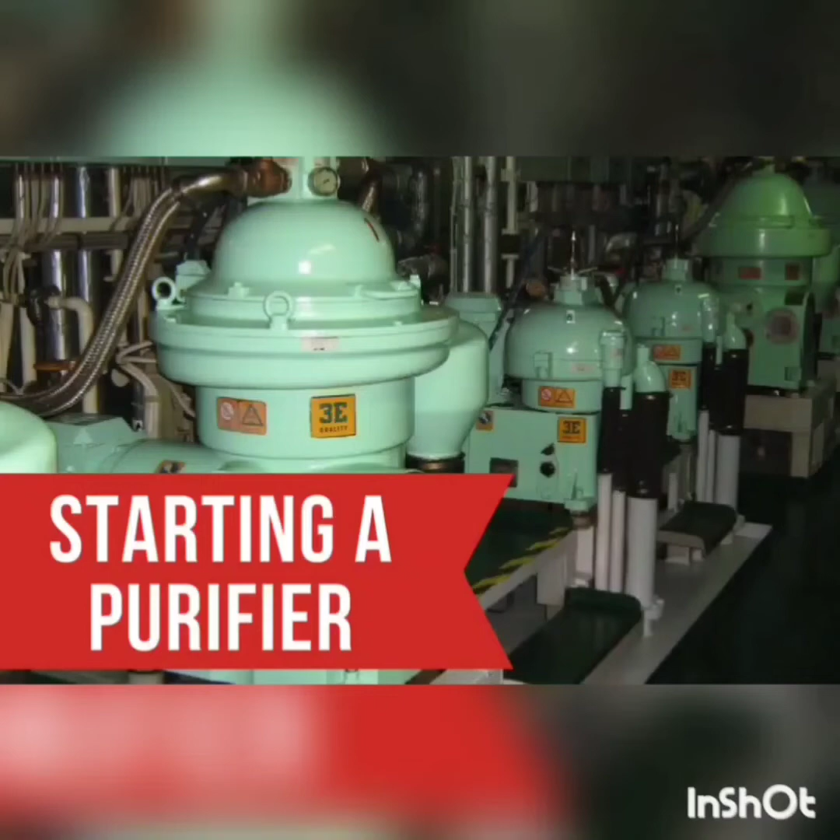In this video, we will understand the sequential starting procedure of the purifier. To start a heavy fuel oil centrifuge separator, the following steps are to be taken.

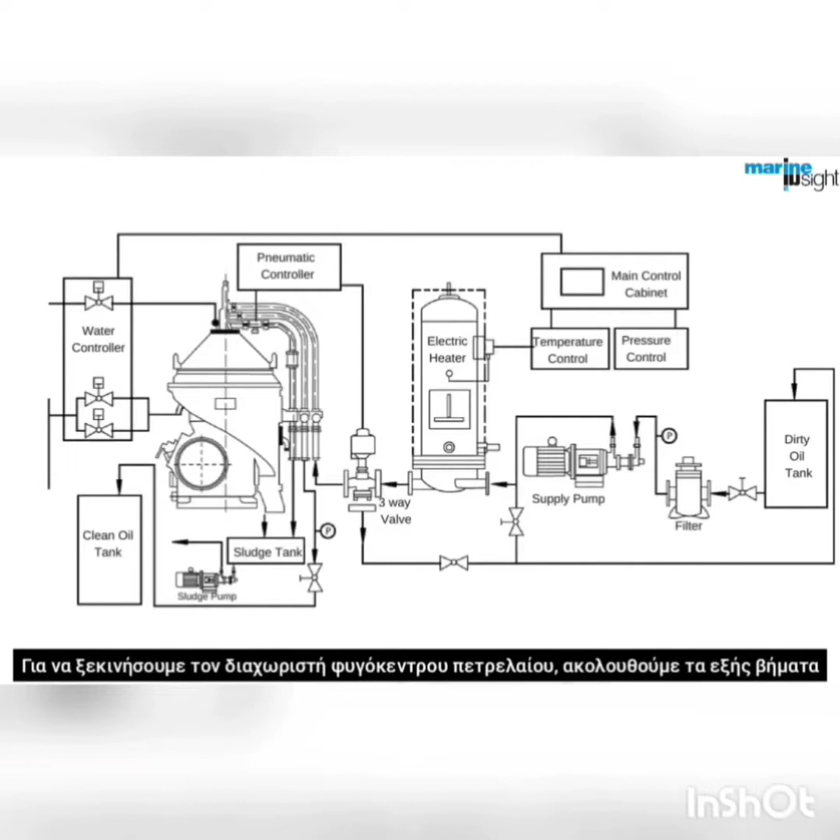Check if the brake is in the release position. Check the oil level in the gear case. Open the discharge valve for the purifier and all the required valves in the line.

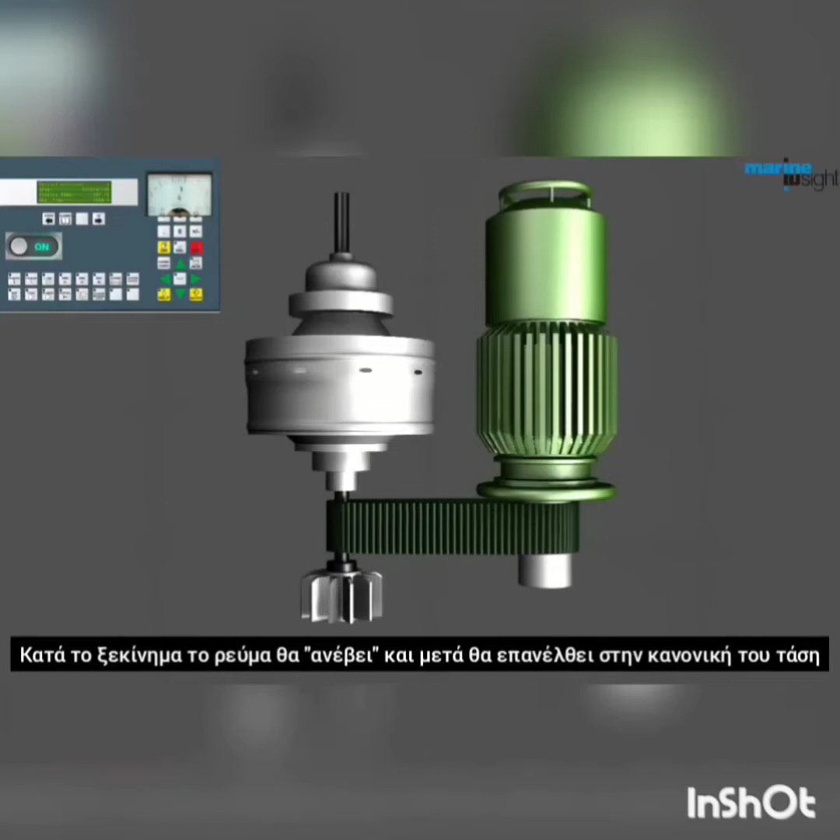Start the purifier power and check for the motor current. During starting, the current will shoot up and in a course of time it will come back to the rated value, which means the required RPM has been achieved. Once the separation program is selected, the controller starts the fuel oil supply pump.

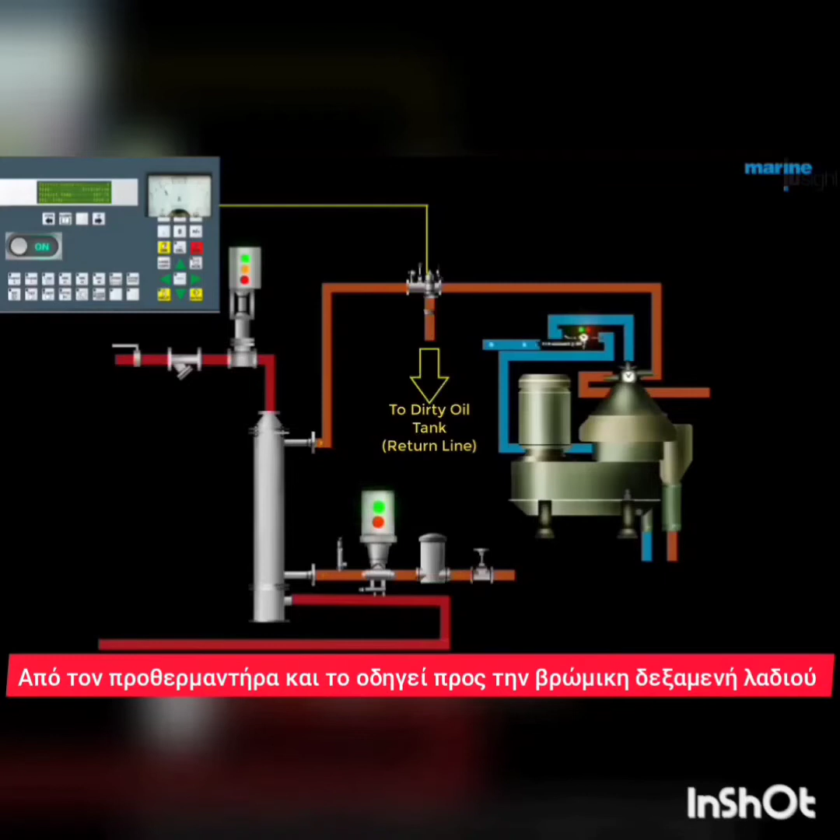Initially, the main controller will recirculate the oil from the heater and direct it towards the dirty oil tank. Open the steam supply to the heater and bring the oil temperature to the set point. Ensure the drains are open so that the condensate comes out from the steam pipe. Close the drain once steam appears.

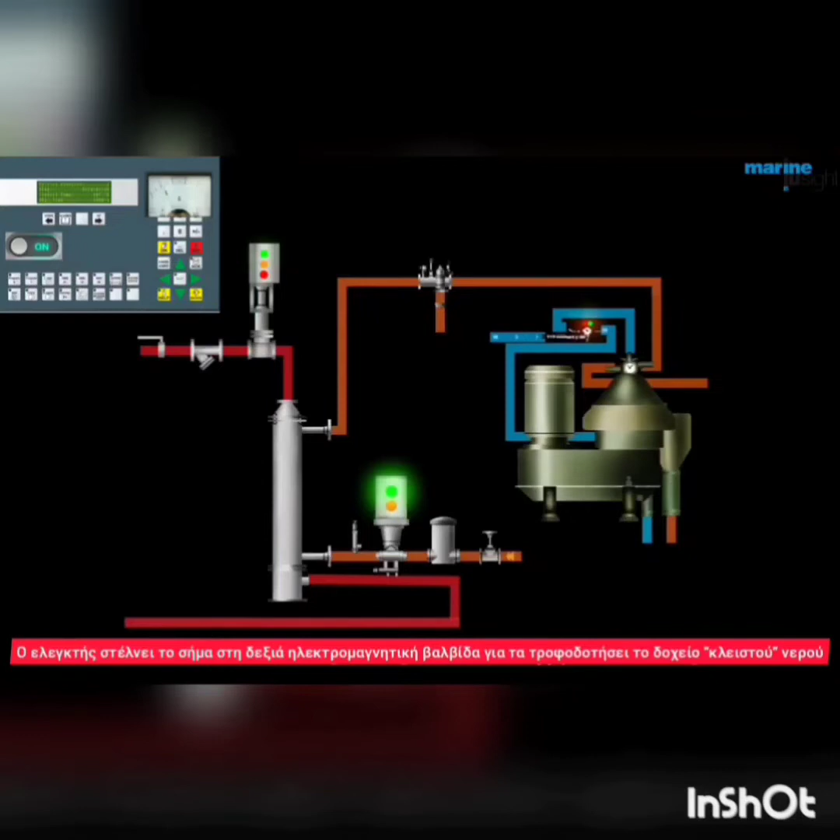Once the oil feed to the purifier is selected, the controller will send the signal to the right solenoid to supply the bowl closing water. As soon as the bowl is closed, the controller will open the left side solenoid to supply sealing water to the purifier. After supplying sufficient sealing water, the solenoid valve will close.

The main panel continuously monitors the oil temperature. Once the set temperature is reached, the controller will send the signal to the three-way valve to open towards the separator.

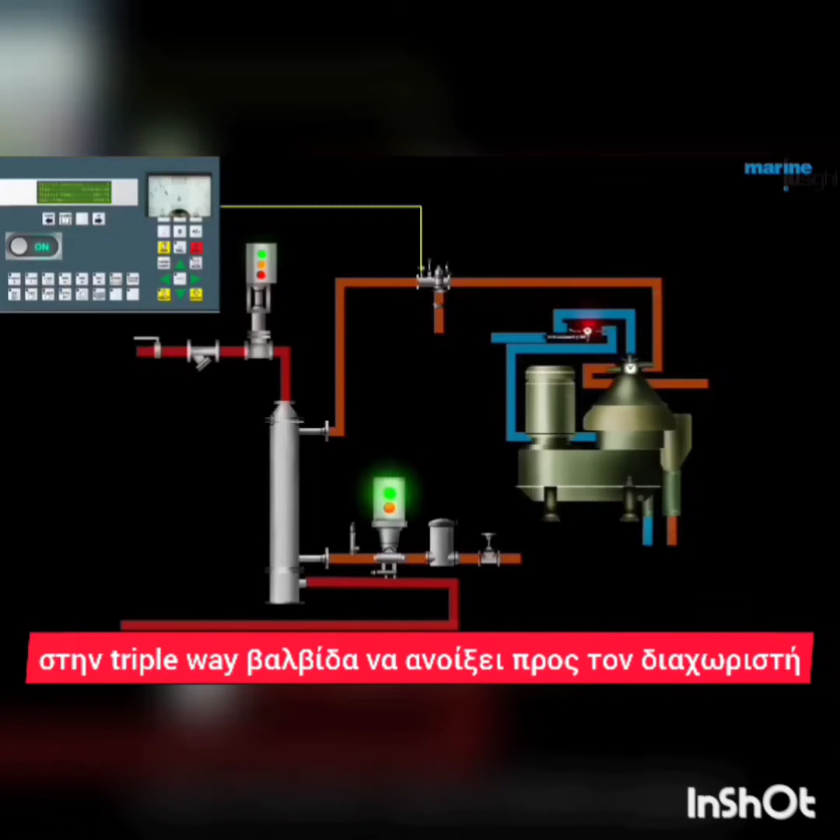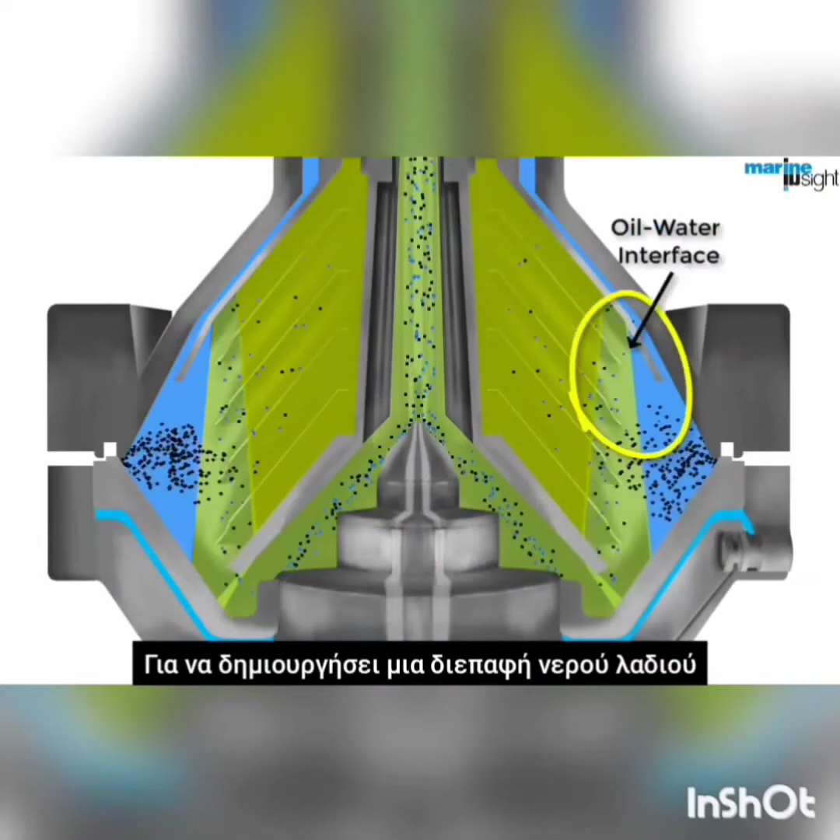The oil will go into the purifier and it will displace the water inside to create an oil-water interface. The position of the interface will be decided by the size or diameter of the gravity disc. The engineer officer should check the manual to fit the proper size of gravity disc for the specified oil properties.

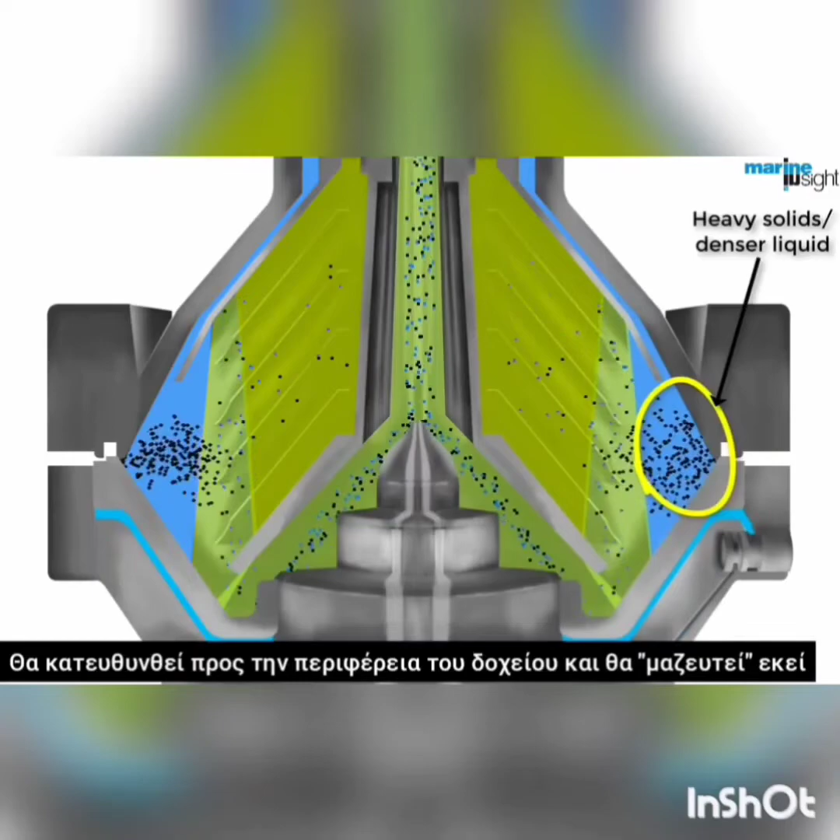Once the oil-water interface is made, the heavier solid and denser liquid will go toward the periphery of the bowl and get collected there. The fixed-type centripetal pump on the top provides sufficient flow velocity to the purified oil and sends it to the fuel oil service tank.

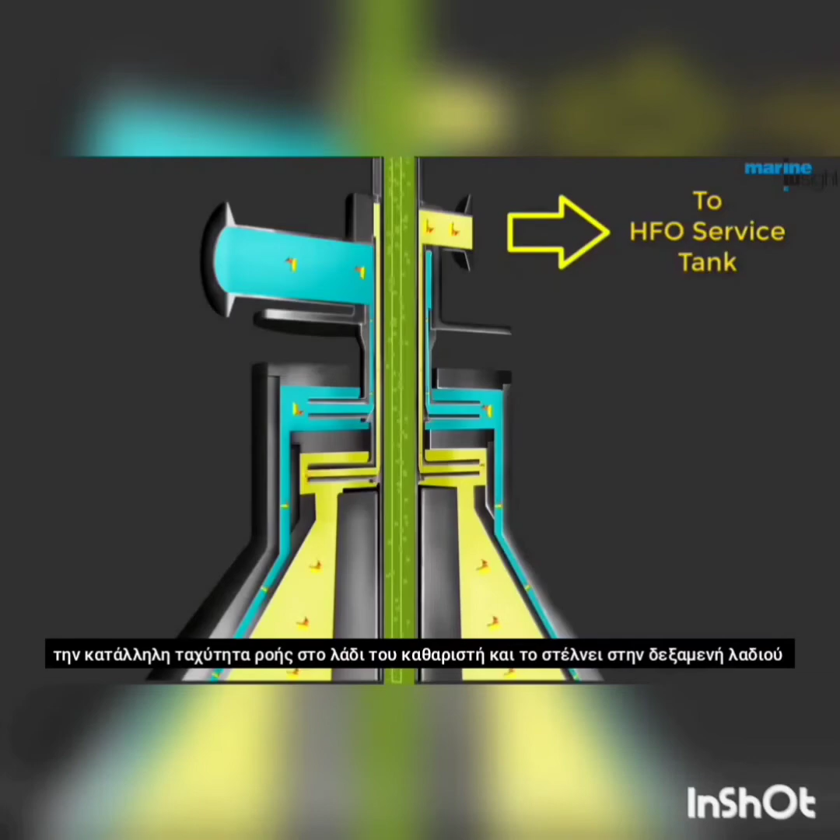The main control panel continuously monitors the back pressure and the discharge valve opening will be throttled to maintain the required feed rate.

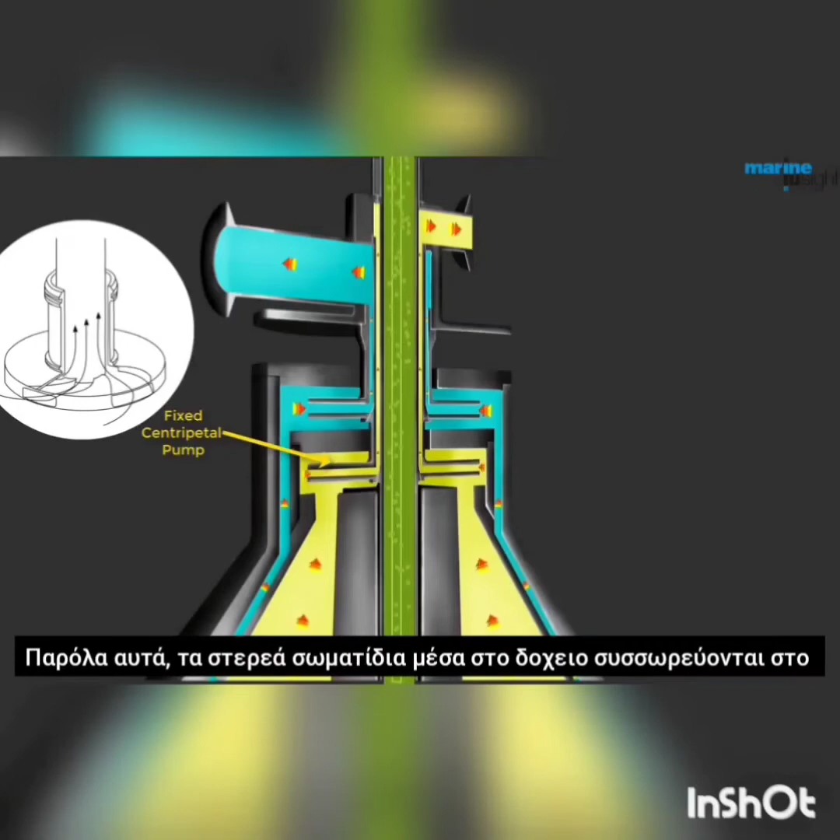When the purifier is in operation, it is continuously separating solids and water from the dirty oil. The clean oil is taken out from the top and transferred to the service tank by the centripetal pump fixed to the purifier. However, solid particles inside the bowl get accumulated at the outer edge due to centrifugal force, and they need to be taken out by a procedure known as desludging.

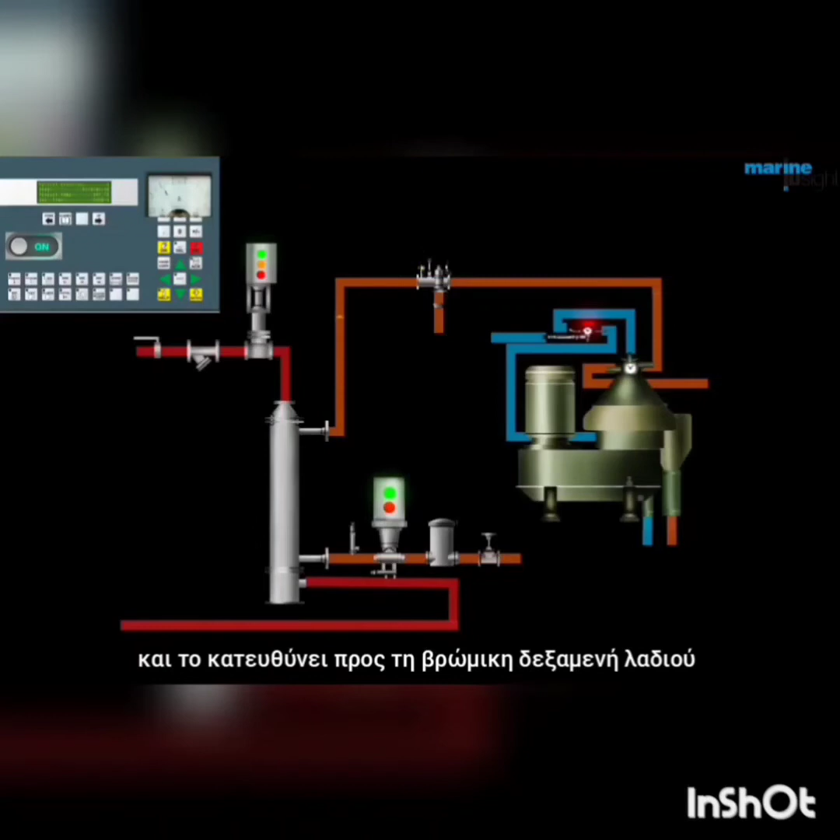To perform the desludging operation, close the feed to the purifier. The main controller will recirculate the oil from the heater and direct it towards the dirty oil tank. Supply the bowl closing water through the solenoid valve. Now, after 10 seconds, open the sealing water to the bowl.

The sealing water should be kept open until the water comes out of the wastewater outlet. This will ensure maximum amount of clean oil is taken out from the purifier and transferred to the service tank. Once the water overflows through the wastewater outlet, stop the sealing water.

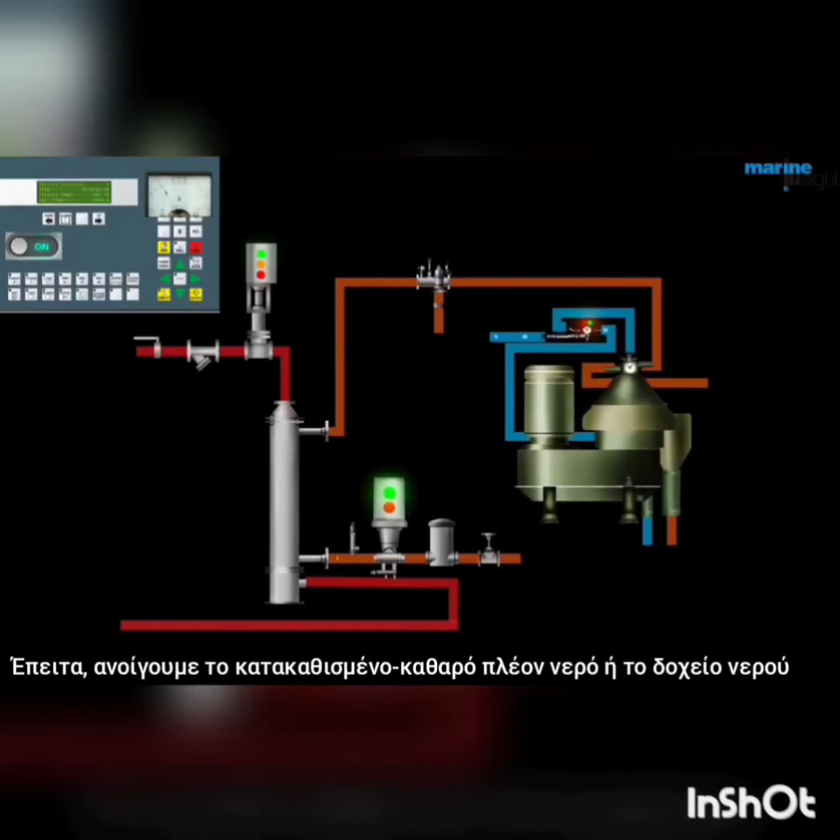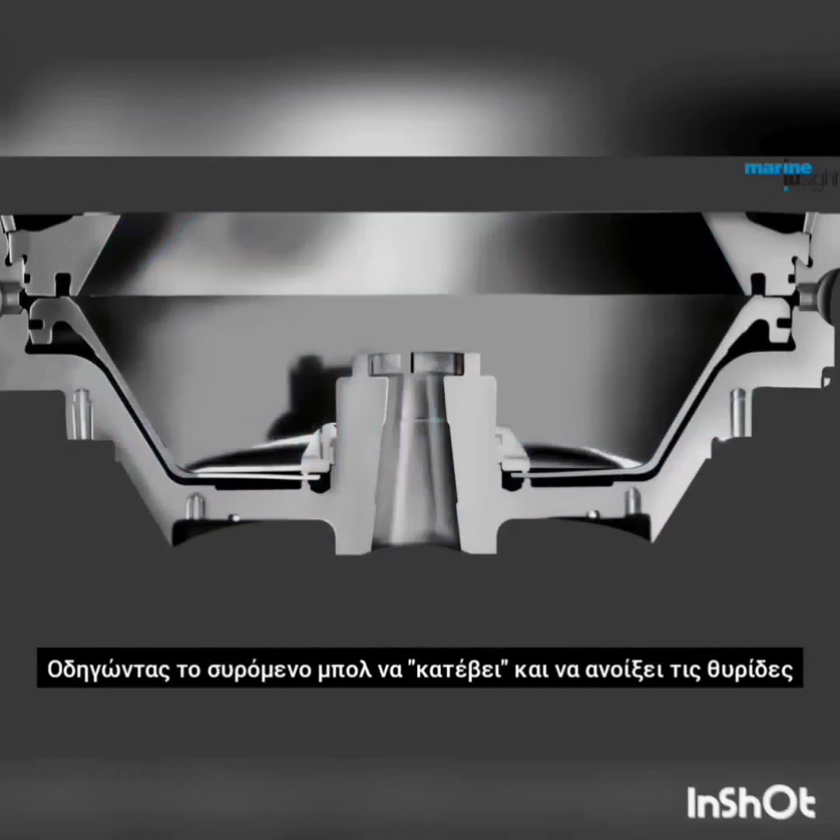Now, open the desludge water or bowl opening water. As the desludge solenoid supplies the water, it will open a small orifice valve, which will discharge the bowl closing water out of the chamber, leading to the sliding bowl coming down and opening the sludge ports. All the accumulated solid and denser fluid will come out of these ports and go to the sludge tanks.

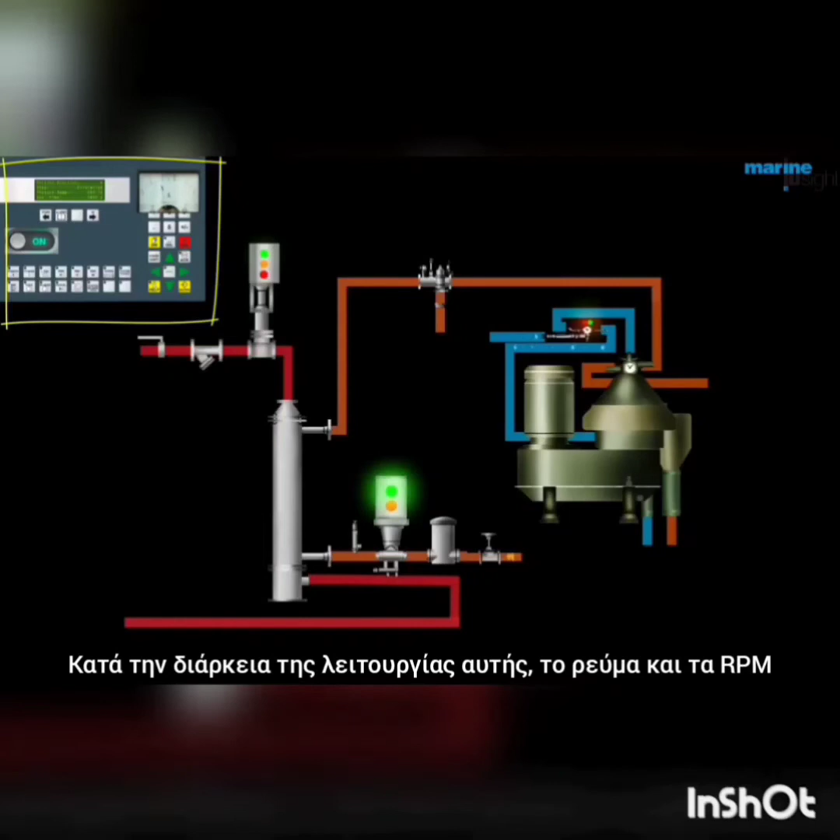During desludge, we can hear a characteristic sound at the opening of the bowl. The current and RPM in the panel will fluctuate, and it will come back to normal in some time. Once the parameters are normal, start the separation procedure by introducing the feed to the purifier, as explained in the previous video.

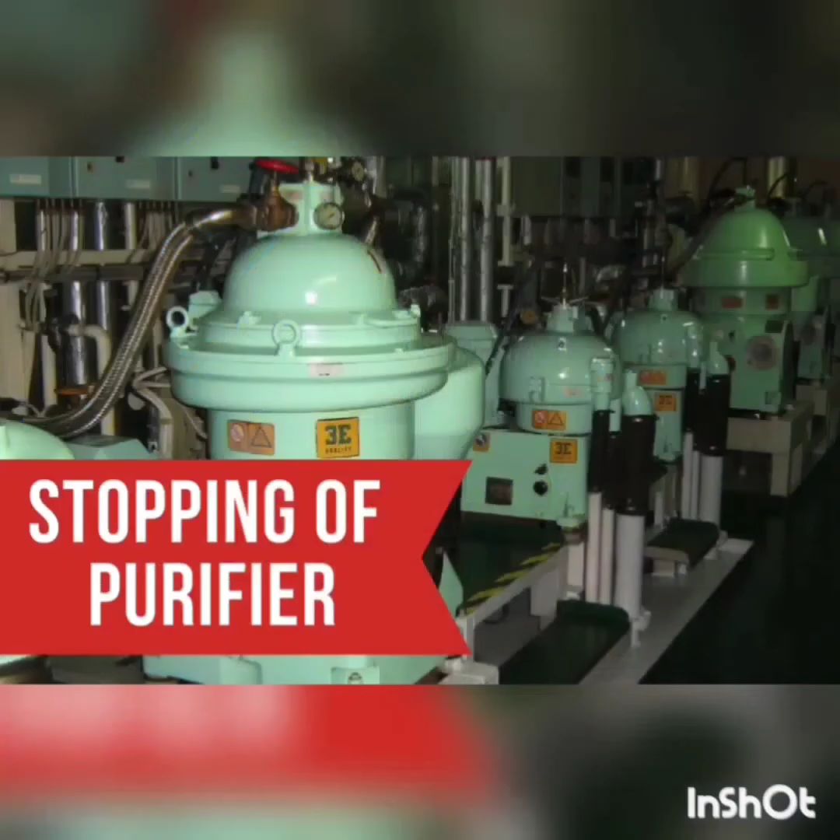Before stopping, the purifier is desludged. After the desludge operation, stop the oil supply to the purifier by setting the three-way valve towards the return line. The steam supply to the fuel oil heater must be closed, else the heater will run dry, leading to overheating of tubes. Once the steam inlet to the heater is shut, stop the feed pump.

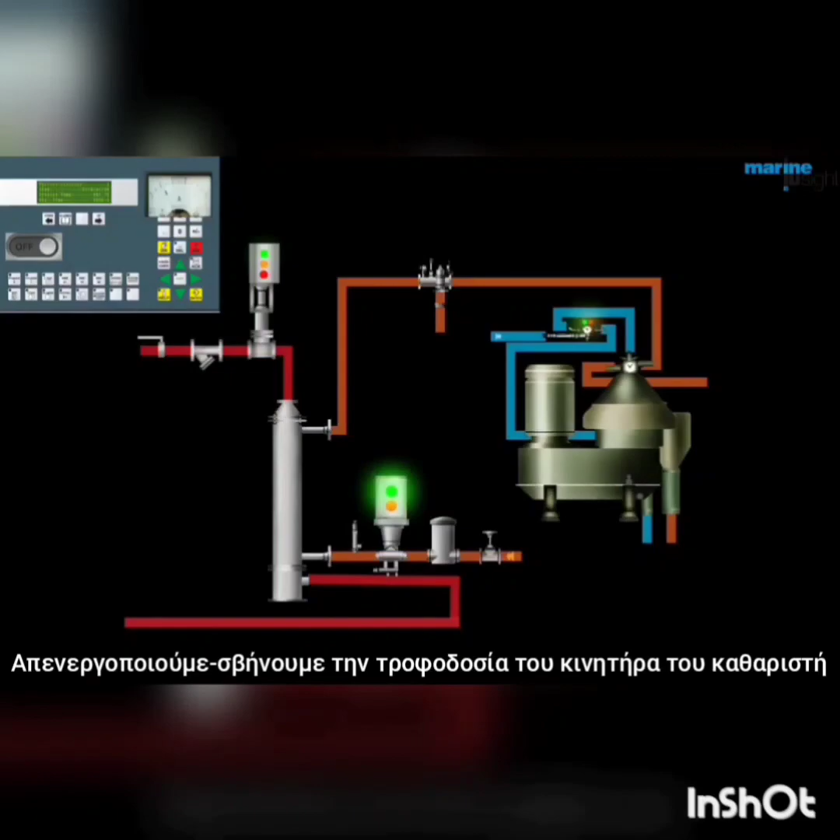Switch off the power for the purifier motor. The bowl will still rotate and slowly come to a halt. Once the purifier is stopped, shut the discharge valve of the purifier.